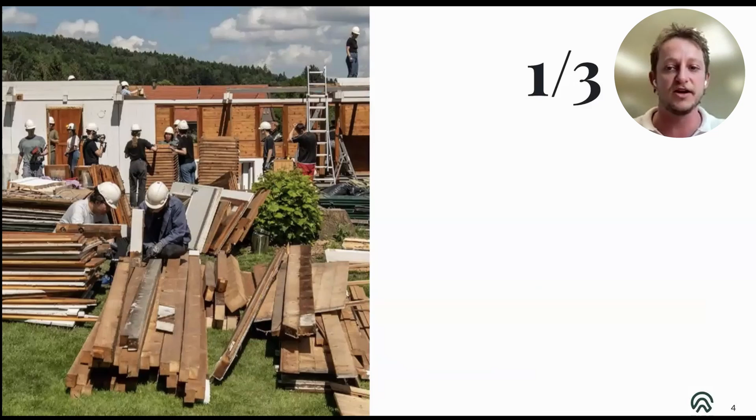So for the talk today, I'll intro with this important number, one third. So the built environment and the construction industry at large is responsible for approximately one third of a lot of things, which include the raw resource consumption, the energy demand and energy consumption, and the amount of waste that is produced. And these numbers are a little bit subject to change based off of who's doing the calculus here, but it's important to recognize how impactful this industry of construction, the built environment, really is.

And a lot of this can be attributed to what's called the linear economy, or a sort of business as usual, where we have these steps when we think about our materials, where we start at the extraction of the raw materials, the processing, refining, manufacturing of products. We're using these materials for a while, and then usually we just put them in a landfill. And so this is what's called a linear economy approach.

And so, what is the circular economy? The idea here is, can we keep materials in circulation for longer? Can we maximize the utility of these materials before we put them out in the landfill? So, there are different strategies for this, which I'll dive into, but it's really about maximizing our material resources before we dispose of them.

So I'll cover four different sections in this presentation. I'll start with the circular economy models, a little history, how they've evolved through time. And then I'll move to digital circular construction. How do we adopt different technologies to facilitate these approaches? Then circular construction materials, with a particular focus on concrete in this presentation, how we can rethink these materials and their applicability for circularity.

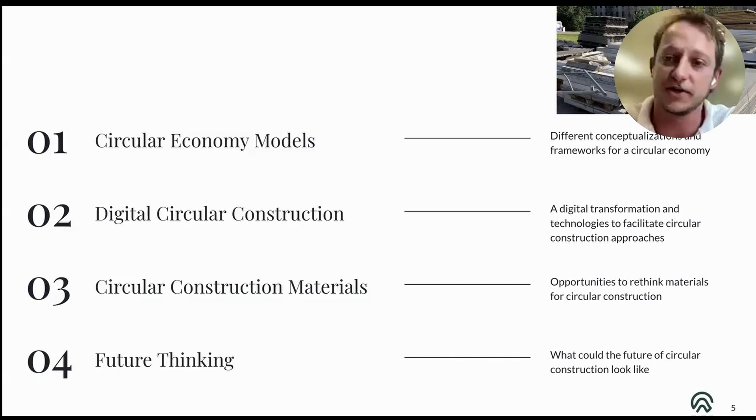And then lastly, a bit of future thinking. So what could the future of circular construction look like based off different policies and different companies that are being worked on right now? So to begin, different circular economy models.

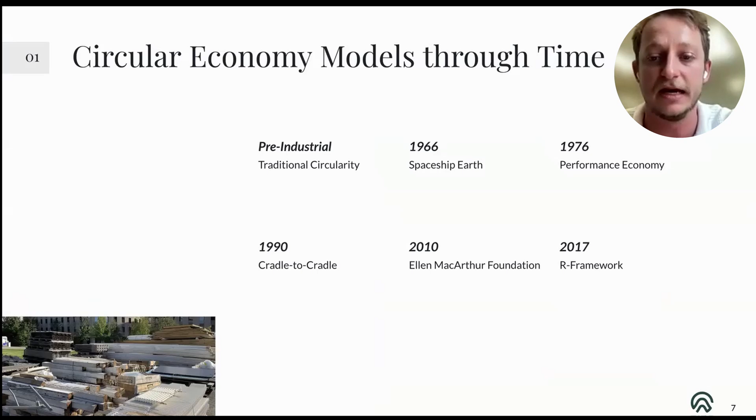If we trace back the history of humanity, this idea of a pre-industrial traditional circularity is not so far-fetched from us. I'll start there, then I'll look at a couple different main models, and end with the R framework, which is my personal favorite. But so the traditional agrarian circularity model.

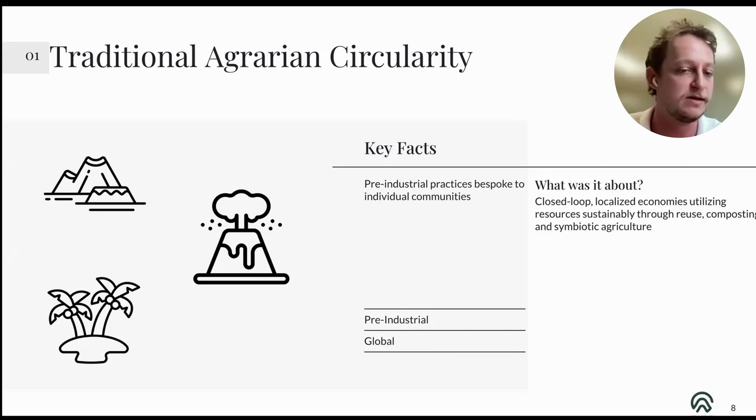So, as I was alluding to, if we think about our pre-industrial ancestors as we were roaming the prairies or the savannas, we had to be more resourceful with the resources that we acquired, right? And so there are these pre-industrial practices that are bespoke to different individual communities. It's about this closed loop, or these localized economies before globalized trade, right? And so there's a lot of reusing and composting. Just a few examples that you can look up in history.

If we look at the Byzantine Empire, there were studies showing evidence of local glass recycling. So glass used in some jewelry was also found in different applications for vessels, for instance. In Pompeii, the infamous city that was crystallized in time, we can see that there were recycled materials for construction. There are some piles of waste that were roughly distributed by their material composition, and some of these could be traced into different parts of construction in buildings in different parts of the city.

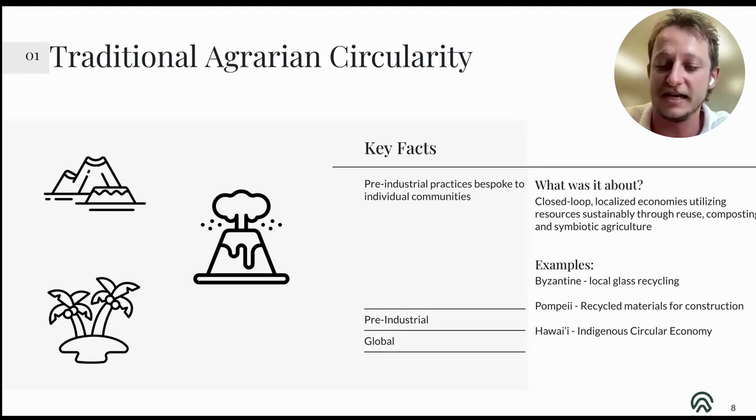And then Hawaii or other indigenous island populations, for obvious reasons, are very much circular economy practices, right? Where there is no trade, we have to be resourceful with what's available in these localized communities. So this is a bit of a backdrop or historical understanding of circularity for our species, so to speak.

One of the post-industrial, modern approaches to a circular economy is called Spaceship Earth, which was initially coined by Kenneth Boulding in an essay, The Economics of the Coming Spaceship Earth, and was later popularized by Buckminster Fuller, an inventor and architect extraordinaire, in Operating Manual for Spaceship Earth a couple years later. So what is the concept behind this model? It's really about Earth conceptualized as a closed system with finite resources.

So Earth is more or less this big rock that is hurtling through space, and we get infinite energy from the sun. So we're an open system when it comes to energy, but we're a closed system when it comes to materials. There's only a finite set of materials on our Earth, on our spaceship. And so we have to learn how to be careful in how we manage these resources. And so this idea of Spaceship Earth emerged.

It lent itself to environmental economics, or perhaps you may have heard of doughnut economics theory and ecological thinking. And this particular quote from Buckminster Fuller is one of my favorites, on this idea of ephemeralization: that technology can enable us to do more and more with less and less until eventually you can do everything with nothing. It's this idea of optimization or maximal use of our resources.

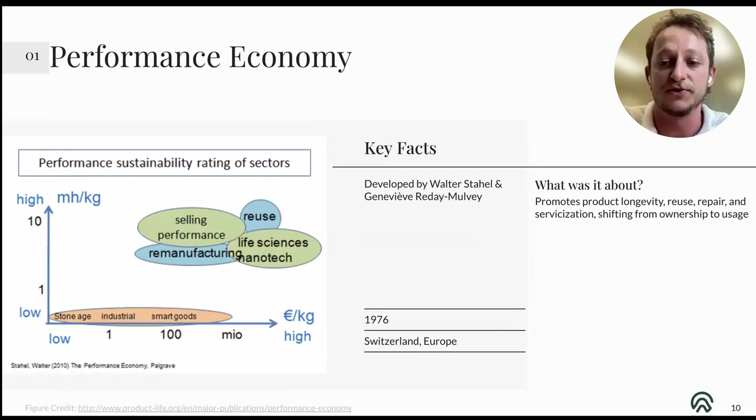Moving on from there, about a decade later emerged what was called the performance economy, largely pioneered by Walter Stahel out in Switzerland and Geneviève Reday-Mulvey. So what was this model about? It's about promoting product longevity, reuse, repair, and shifting from ownership to usage. So instead of purchasing a material and being responsible for the material itself, you could basically lease the material as a service, so to speak. You're buying the utility of the material rather than the ownership.

The classic example from this model is a Xerox machine or copier machine in offices, where oftentimes the enterprises themselves wouldn't own these machines, but would actually have a leasing contract with the manufacturer. And so it removes a bit of the liability from the user. When they become out of date, the manufacturer can bring back these machines, perhaps repair some parts, extract some valuable materials, and replace them. So this is more about the performance of the material rather than the ownership of the material itself.

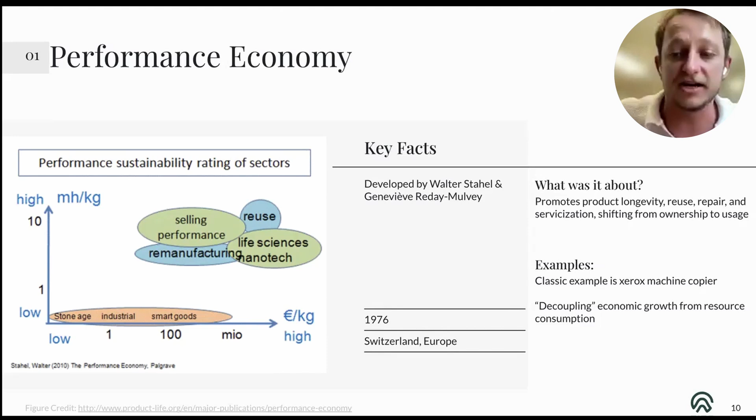It also gave way to another popular concept called decoupling, which is the separation of economic growth from resource consumption. After this, the next popular model was cradle to cradle in 1990. This was put forward in a book written by Michael Braungart, a German chemist, and William McDonough, an American architect. Braungart, from the chemistry side, was interested in this idea for a while. Then McDonough was able to bring some scale and different perspectives.

And part of the difficulty of a circular economy these days is that we're really combining these. And so if we're using both, it becomes difficult for a pure recycling approach because we have organic materials mixed in, and it's difficult for a pure biological approach because we have a lot of potentially toxic materials or heavy metals that are looped in there. So they're really pushing the idea of we should design our products, our systems, our buildings with these two cycles in mind of how can we separate and think about the biological cycles and the technical cycles.

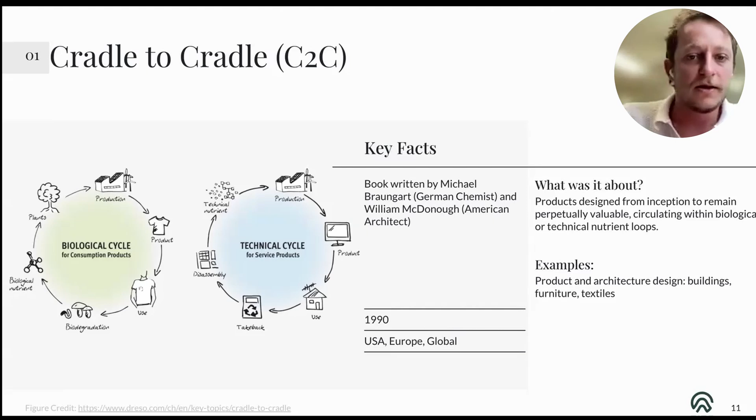Beyond this becomes the Ellen MacArthur Foundation model. So Ellen MacArthur is an extraordinary woman where she set the record for the solo circumnavigation around the world in a sailboat, I believe in the early 2000s. And then about 5 years later, put together this foundation that was interested in pushing the circular economy models. And I think this is probably the most recognizable from a business perspective.

And then bringing it back to my industry of the built environment. So Arup, which is a big consultant for design and construction, teamed up with the Ellen MacArthur Foundation and created the Circular Leaders Group. And they have a lot of resources on designing for circularity and different toolboxes as well.

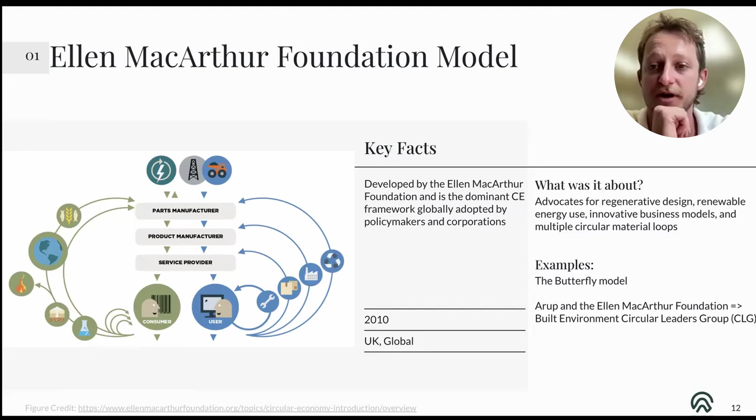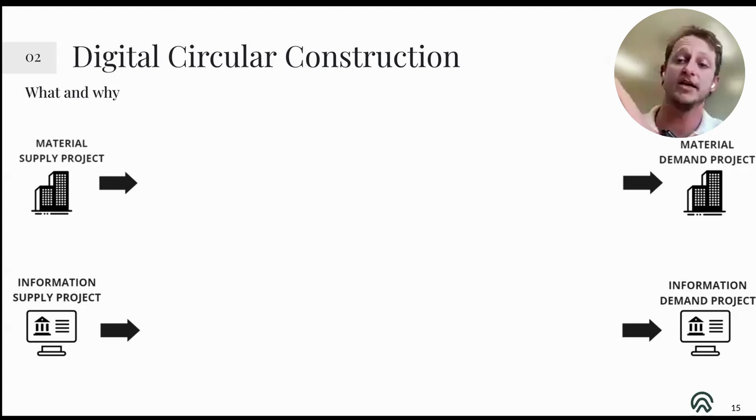This becomes a bit more challenging when we think of the construction industry, because if we want to reuse a steel beam, but we don't exactly know what the strength of that steel was, there's a whole lot of liability, and you're not going to find a structural engineer who's willing to stamp these drawings. And so what's equally important with the material is the information on these materials themselves. So we're looking at how we can use different strategies and tools to collect, combine, and communicate the information with these materials.

And so the proposed framework is this D5 framework, which includes disassembly, distribution, design, deployment, and detection. Each of these can be facilitated with different sorts of technologies, and I'll dive into each of these steps and give an example for each of them.

And this can be helpful at an individual level, perhaps before demolition or deconstruction, to get an understanding, do an audit of these structures, right? Similar approaches can be used inside, but it can also be used at an urban level. If we use Google Street View images, for instance, we can en masse collect a lot of urban information about what typology or what the facades are made of in a certain city.

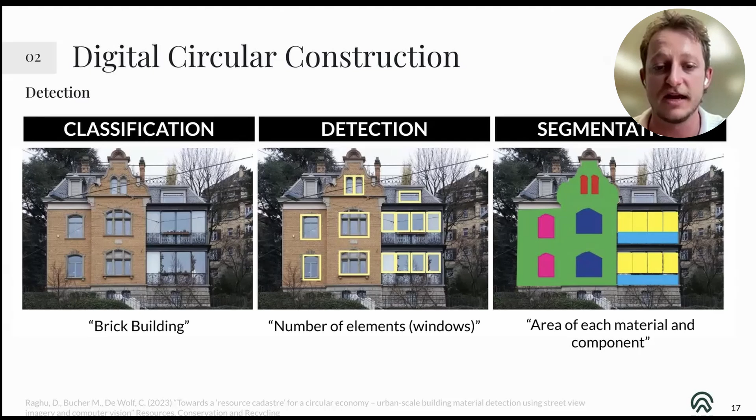From detection, moving into the disassembly side. This is very much an active area of research and far from commercialization, but can we think about how we might be able to automate the disassembly of a building? This particular researcher has developed a workflow. We start with scanning a certain component, in this case a steel element, and segmenting it. Okay, so where's the steel? And then can we detect where the weld beads are, where the bolt holes or the physical bolts themselves are?

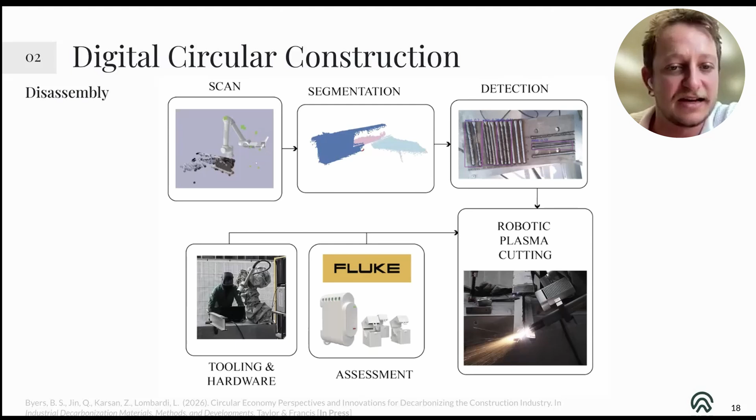After this, we can use a robotic arm to automate the plasma cutting right along the seam, so we know where the edges of the beam are. And from this, we can extract the beam itself. So a bit more hardware focused, but in theory it is possible, and I think an important tool to add to our arsenal in digital circular construction.

On the distribution side, I was talking about textiles earlier, right, or shirts. A lot of these products, similar to grocery stores and consumer goods, have barcodes, and there are apps that can read this product information, perhaps where they came from, where the textiles are from, the brand, so that you see this at the consumer level, the cashier, the distributor. And so we have this provenance of information through the life cycle of a material.

So on the distribution side, how can we apply these principles to our construction materials, particularly our valuable ones? Using technologies like QR codes or RFID chips, and there's even some futuristic research on using DNA as information storage, can we keep that information available through the life cycle of a building, deconstruction, and reuse in a different application? This lends itself to concepts sometimes called material passports or product passports, which is this suite of information associated with the particular construction product.

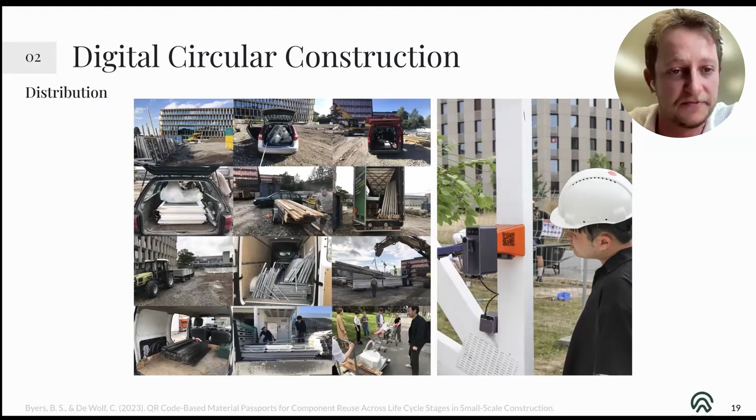On the design side, this particular research paper was looking at: if we have a known finite set of elements deconstructed previously, so we have a wood frame with a certain amount of linear elements, and we have the dimension of these elements, can we create a design algorithm to automatically match it to a new structure based off

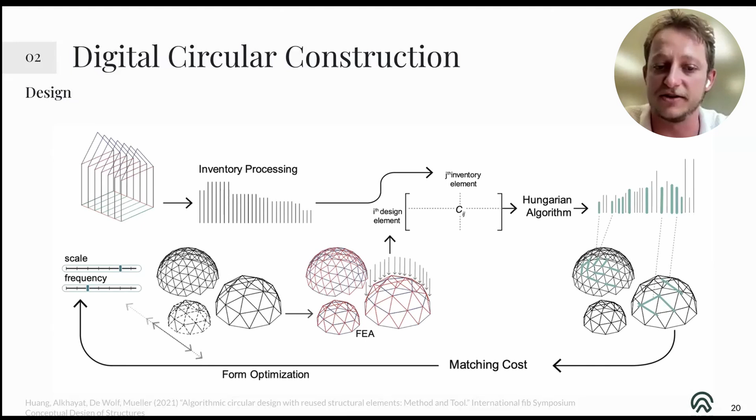the given constraints? One of the challenging parts of circularity in construction or reusing in construction is that when we're doing a new build, we can pick the dimensions that we want and just procure them from the factory. But when we're reusing, we are oftentimes constrained by what is in our existing material stock. So this adds another layer of difficulty that we can perhaps help automate.

And then lastly, on the deployment side, using tools like augmented reality and virtual reality, can we facilitate the reconstruction or construction of materials by having placement instructions or disassembly instructions or having product information appear as people are actively in the construction phase?

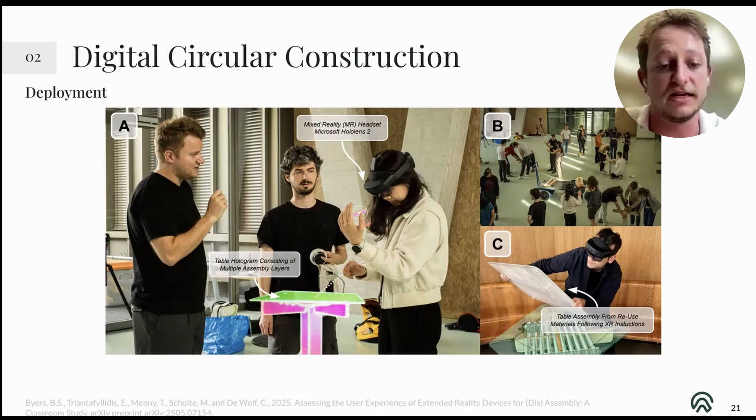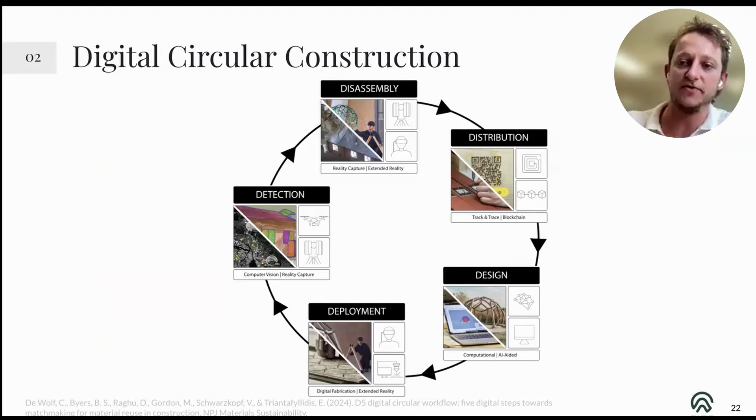So this was an overview of different technologies and tools that we can use to digitalize the different processes of circular construction for this D5 workflow here. And then I'll move a bit more into the material side, so circular construction materials, particularly concrete.

So we have this broader issue of industrial solid waste. There's industrial solid waste and municipal solid waste. The municipal waste is the waste that we throw out in our trash cans at home, and we kind of have an idea of how much waste we produce, how much we have to take out the trash, right? Industrial solid waste is difficult for the average consumer because it's not something we really see or interact with, because it's happening on the industrial side.

So this is coming from the manufacturing, the factories, the mining, also from construction and demolition. And there's a lot of it produced. Particularly in the US, the numbers average out to about 20 tons of industrial solid waste produced per person per year. And this is to produce things like the roads that we're using and all the materials that

we're using. And there's a phrase which more or less goes along the lines of: if you can't grow it, you have to mine it, right? So every material in the building that isn't from an organic base had to be mined at some point. And so this is a really big industry which necessarily produces a lot of waste. So how do we deal with this waste?

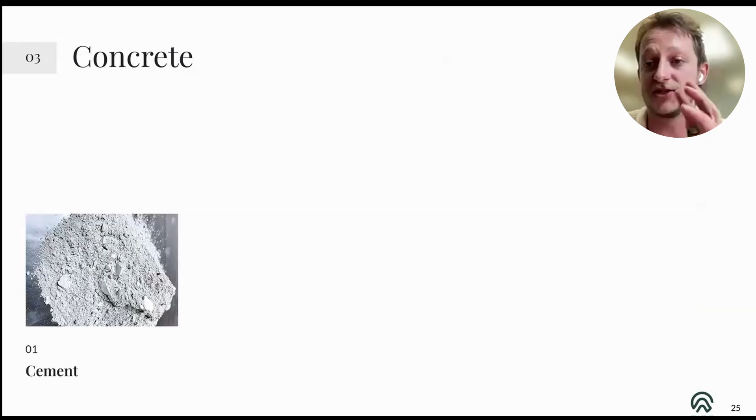In comes concrete, everyone's favorite material. It gets a lot of rap from some of the folks who are working on the organic side because it is a very energy intensive process, particularly the cement, which is the most important ingredient. Cement acts as the glue between the rest of the materials, which include water, sand, and aggregate.

And so when people talk about the CO2 footprint, it comes down largely to the cement manufacturing, the cement production. The water and sand and aggregate are the more natural ingredients around this. What's also important to recognize, though, is that concrete is the second most used material in the world after

water. So even if we can replace some concrete with perhaps organic-based or nature-based materials, concrete is not going anywhere. It is vital for our infrastructures, for our foundations, for a lot of the construction we have going on.

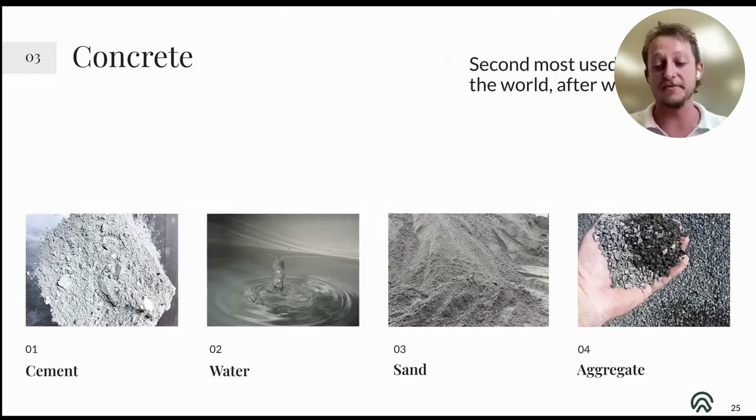So what folks have been looking into already, and this is not necessarily a new idea, you can find traces of supplementary cementitious materials all the way back to the Romans. But it's this idea of: if we have a set volume of cement, can we reduce that and replace it with separate materials, including some of this industrial solid waste, right? This slag or this fly ash, and achieve similar properties, or perhaps slightly vary the properties as needed.

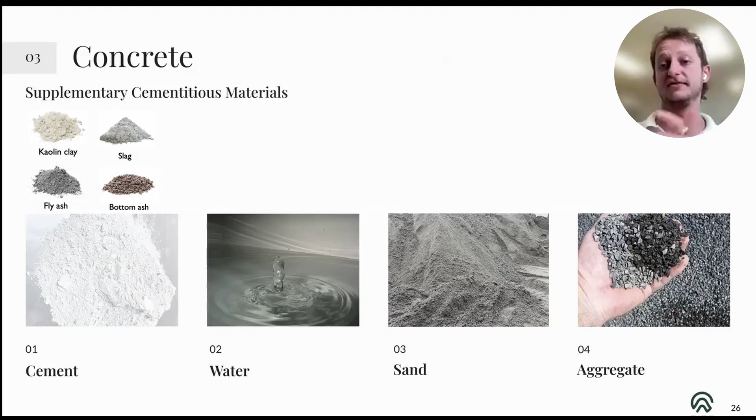So some of the work that's come out of our lab is the use of a natural pozzolan, which is volcanic rock in origin. In this case, these originated in Chile, as a supplementary cementitious material.

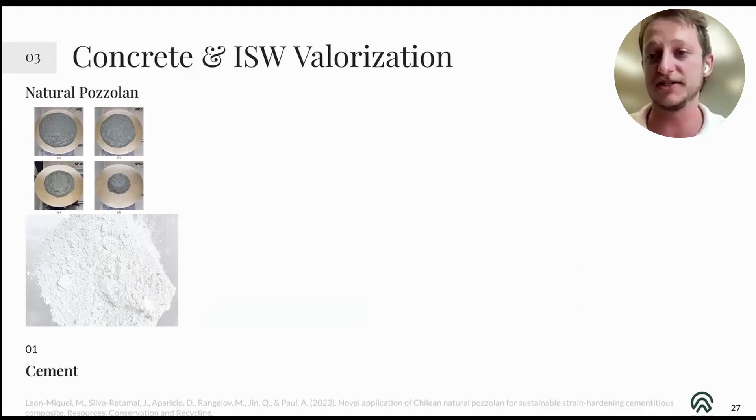And so with this, we ran different tests with the NP0, so with a 0% replacement, or the business as usual case, compared to different amounts of replacement with the natural pozzolan, with this industrial solid waste, to achieve similar or slightly varying properties for our concrete.

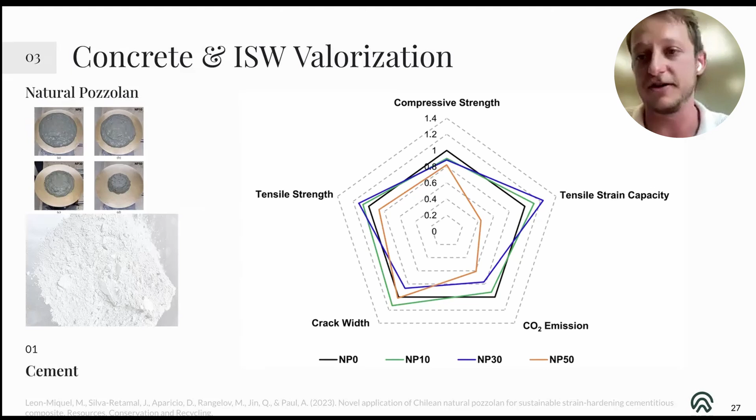So this word valorization really kind of means using waste, or reclaiming the value out of the waste, out of the industrial solid waste.

So why? What are the challenges for infrastructure? A lot of it has to do with concrete, to be honest. So the decay of concrete. I'm sure we can all think of stories of a bridge collapse, for instance, where we needed more tailored maintenance or more frequent maintenance or repairs of these infrastructures.

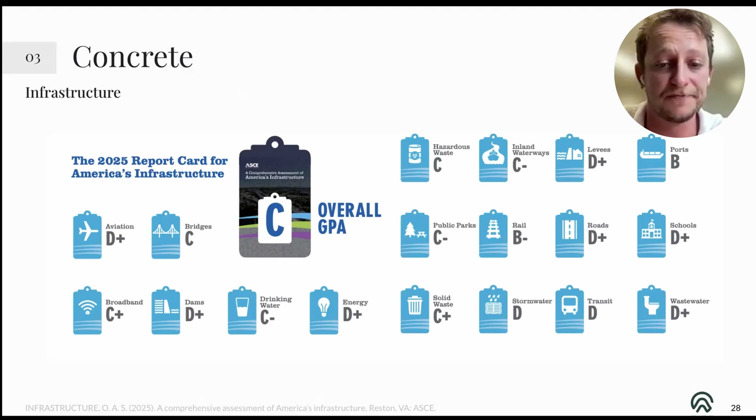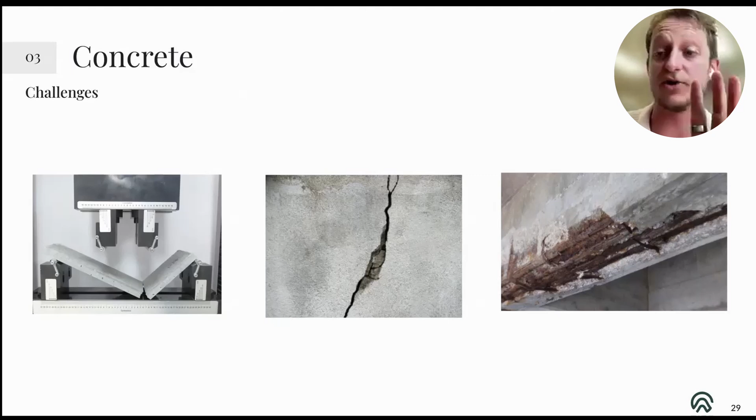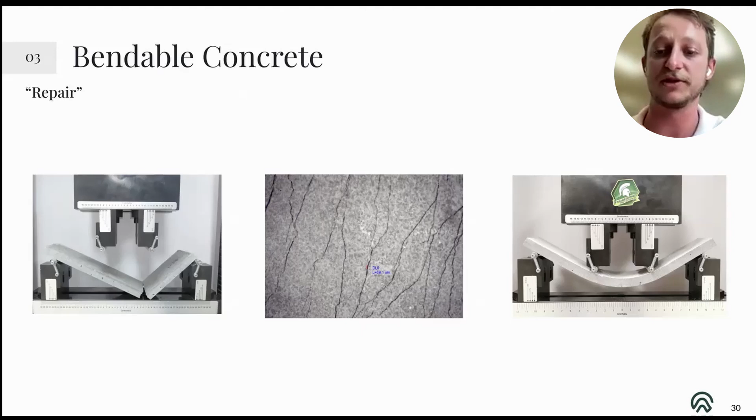So if we don't have as much concrete that decays over time, then this helps with the repairing process. So overall, when we combine these two strategies for concrete, the industrial waste valorization as well as the bendability, how does this lead to circularity of concrete? It does so through the repair strategies, the reduce and the recycle.

So when we're talking about reduce here, we think of the whole life cycle of an infrastructure asset. Perhaps a bridge needs to be repaired every 10 years. Or even now on MSU's campus, a lot of these roads are being repaired, right? So there's a lot of traffic. And so we have to tear up this top layer and then pour new materials every so many years. If we can make these materials last twice as long, then that cuts the total amount of material in half. And then lastly, for recycling, bringing this industrial waste into the cementitious materials itself.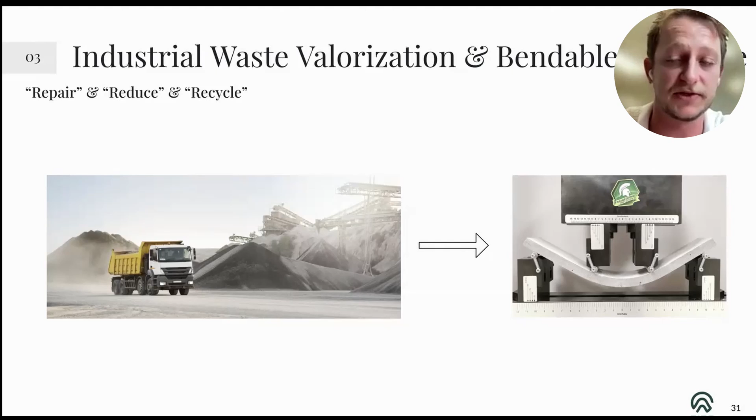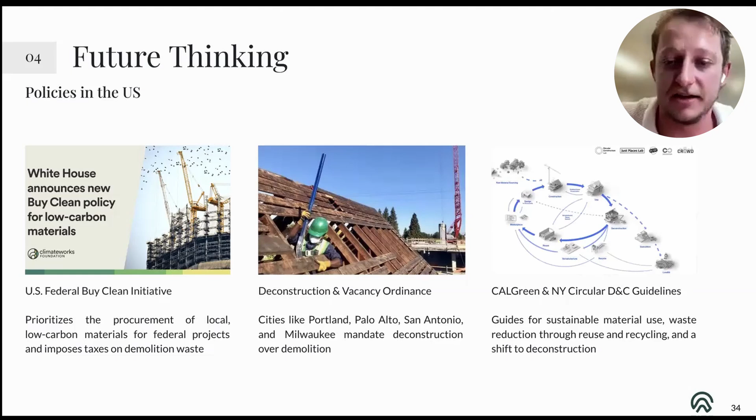And then a bit at the state level, I'll particularly highlight California and New York. For California's building code, CalGreen, I know some folks that are actively trying to implement some circular practices in their building code there. And New York City first released these circular design and construction guidelines. It's been scaled up into a white paper for state recommendations in collaboration with some researchers at Cornell, providing guidelines for sustainable material use and waste reduction. And they're hoping, as they get more case studies, they can build more information to provide more tailored recommendations.

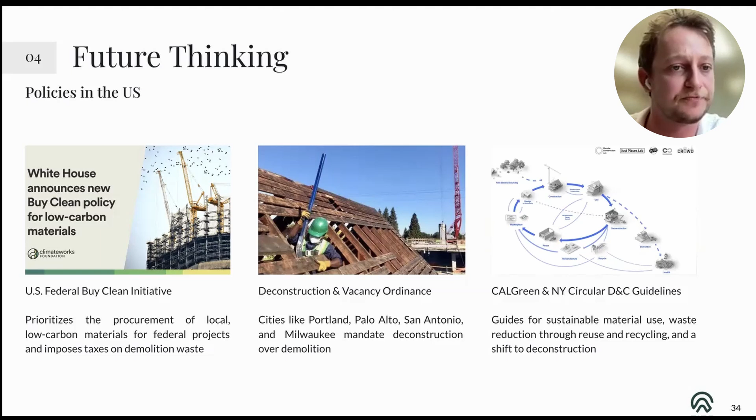So what could it look like? I'll highlight three different companies or projects that will be interesting to continue to follow. The first, in California, is a company called Urban Machine. They are a unique startup that is very tech forward in their approach, with this mobile, solar powered, robot guided assembly line that uses computer vision and all of the fun words. Basically, if you have timber coming off of a construction or demolition site, perhaps it's formwork or old timbers from framing.

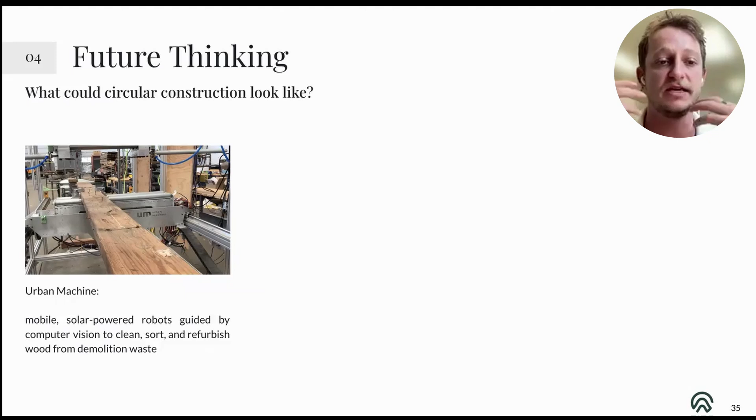If you drop it on this assembly line, it'll use computer vision to identify the extra screws or metal fasteners, and a robot arm will help pick these out. They're sanded and refined, and at the end of the line, you can potentially reuse this wood again after visual grading. So pretty cool, this mobile application to keep these timbers in use for longer, right? This is the core of a circular economy.

This company, CircoTrade, is actually based in France, but is trying to increase its global footprint. And they are interested in the economy side of a circular economy. So what are they doing? They're building a futures market platform for steel building elements. So can we create financial incentives to think more long term for our buildings?

So if you are a building owner and you know you're going to deconstruct your building 10 years from now, can you sell futures on your steel elements? So effectively, other people will become owners of these materials when they become available, treated like commodity trading. But the commodities are actually over your head right now. So a pretty interesting idea that they're getting off the ground. A lot of the challenges in circular economy and construction are financial, as it's generally a low profit industry.

And then lastly, the most ambitious project, that perhaps you've heard of in the news, is NEOM in the Middle East. One of their projects is called Oxagon, which is a floating industrial center where they want to use a lot of Industry 4.0 technologies and circular economy principles to create this future of a sustainable city.

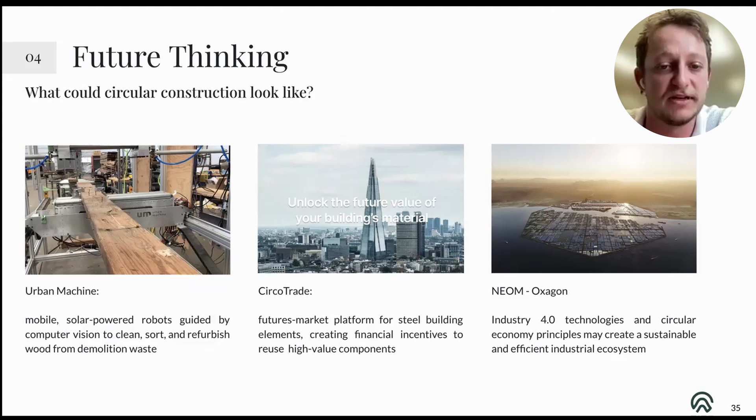And so some of this will come through 100% renewables from the energy side, and then a bit on the material side as well. But it's interesting that the ambition is there, and we'll see as the construction continues how that unravels, or what the success rate is.

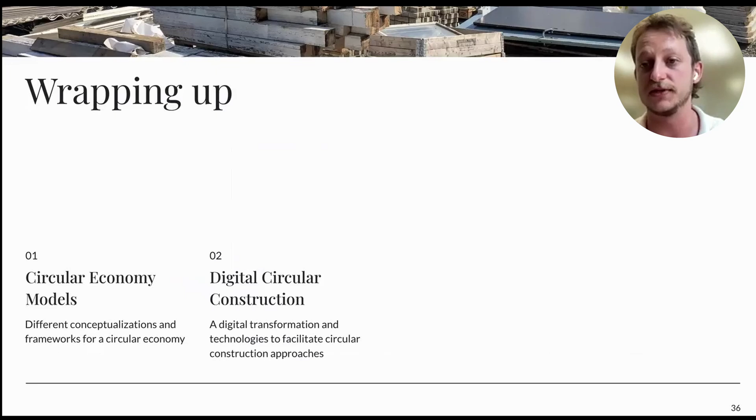So to wrap things up, what did I talk about today? I began with the different circular economy models, so different conceptualizations through time, and some of the big ones to keep front of mind, ending with the 10R strategies. Digital circular construction, so I touched on a couple different technologies and tools that we can use to potentially facilitate or upscale circular practices, and the overall framework we can use to think about digital circular construction.

Then I touched on circular construction materials, particularly concrete in this case, so the circularity potential of concrete, and the work that we're doing here at Rise Lab. And lastly, future thinking. So what could the future of circularity in the built environment look like from the policy level, from top down and bottom up, and high tech and low tech? I think there's a lot of potential for this industry.